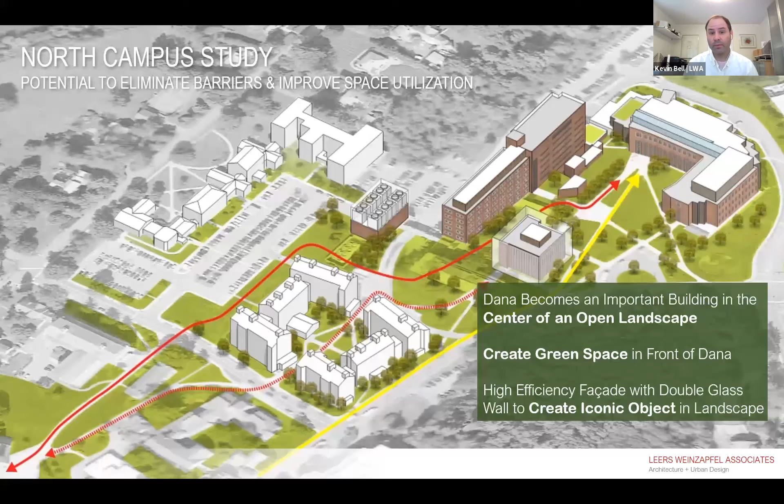And really we were looking at a double skin, a double wall facade. So we had this idea about the building being this glassy envelope, a new glassy envelope around the existing brick building that was the Dana Medical Library. That's something kind of akin to the Academic Center at the University of Oregon by ZGF Architects.

And so you can see Anonymous Hall is at the end of College Street, and the campus really spirals out from the green away to athletics, student life, connection to Main Street to the south. But we wanted to develop and really reinforce some of the interior pedestrian paths that made their way from the green up to North Campus.

So we really completed a path that existed in some ways, but never really was completed until this project and the work on Anonymous.

So with that, I'm going to turn it over to Craig to talk a bit about the energy goals and technical analyses. Hi everybody. So like a lot of universities, Dartmouth has ambitious energy and sustainability goals. They have a campus sustainability office, climate action plans, and things like that. They have energy policies that get down to prescriptive requirements for enclosures and things such as that.

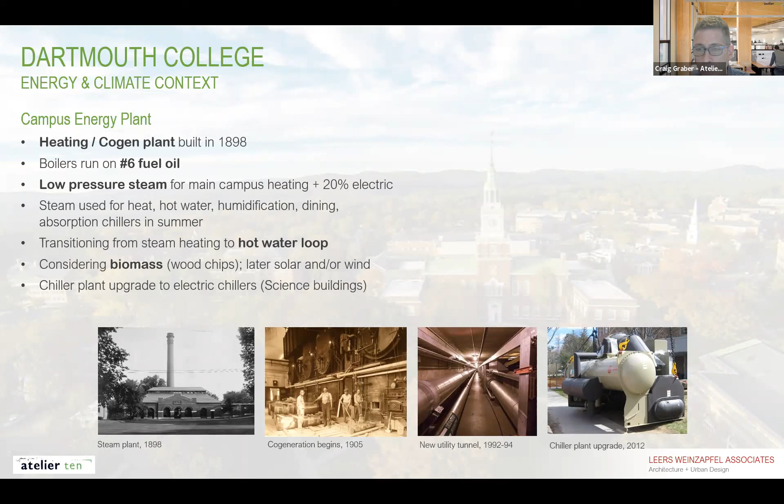They're kind of transitioning the distribution from steam to hot water, and then the plan is to transition the fuel from oil to biomass, because there's a lot of that around in the woods surrounding Dartmouth, and then later to solar and wind to help them meet those renewable thresholds by mid and end of the century.

And then next, Kevin. I'm imagining most of this audience here is in the Boston area, so pretty cold up in New Hampshire, zone 6A, heating dominated, cold winters, a lot of snow, a lot of cloudy days. So we always start by looking at the climate and seeing what strategies make the most sense for this particular climate.

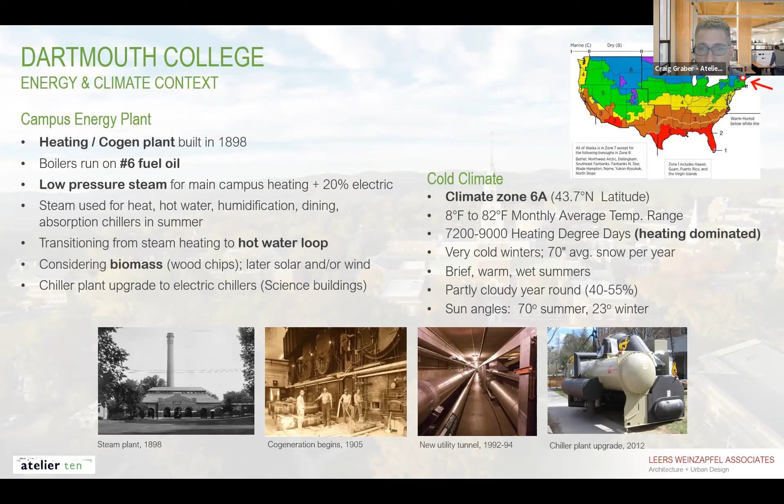When we work with LWA, and really with any architect, on all projects, we like to start with the passive design principles first. I'm sure the COTE population knows about passive design, but we're talking about climate responsive strategies, the stuff that's good, responsible design, the kind of stuff architects did 100 years ago without thinking, and then we kind of got away from it in the middle of the last century.

But for this particular climate, for this project, the principles we targeted were: because it's an existing building, gut renovation, trying to keep as much of that embodied carbon on campus as possible. Preventing heat loss, since it's a heating dominated climate, we want to keep that heat in the building, and then balancing that with letting the sun in, using that for passive solar heating.

You see that the glazed facade is a southwest facing facade, so trying to balance letting in the appropriate amount of daylight, not letting in too much heat gain, and so on. And then naturally ventilate if possible. In this particular climate, there's a lot of opportunity for that.

These are some of the specific strategies we ended up pursuing: reusing the building structure, we'll get into that in a couple minutes. Compact massing, LWA essentially was following the massing in the existing building, but this kind of massing makes a lot of sense in a cold climate.

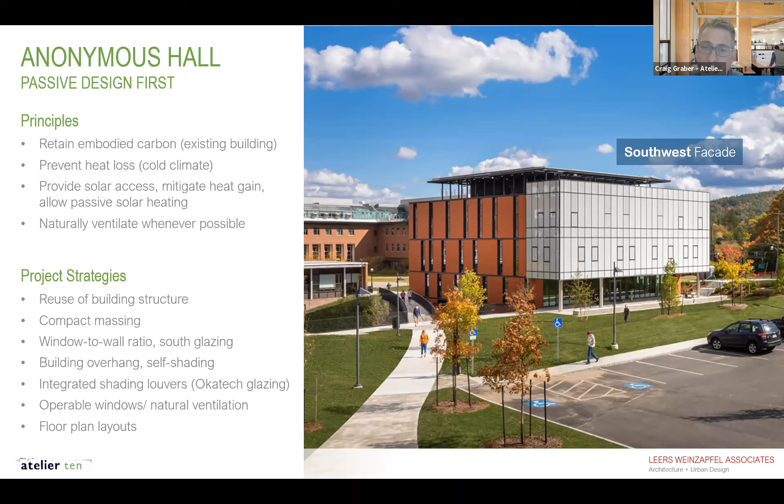Those spaces on the south side are predominantly more lounge, gathering, and circulation type spaces where people are moving through, transitory kind of spaces. So people have the flexibility to get up and move seats if they happen to be sitting in the direct sun. That informed the floor plans as well.

We'll be touching on each of these strategies, but we didn't quite get to net zero. We're going to describe the process and the thinking, but these are some of the strategies: the insulation of the opaque walls, the efficient mechanical systems. Once you're getting all your loads down and have a good envelope, then you start looking at the renewable energy.

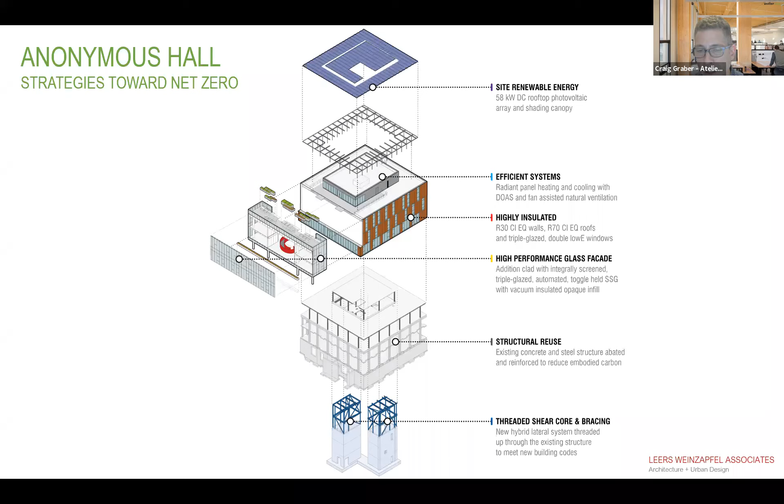I just want to talk for a little bit about our role on the project, what we call environmental design, which is the technical analysis that supports the design team. We like to get started early.

In this case, we were brought on during concept, so our work is more front loaded, and we're trying to inform the design. We work very iteratively and integratively with the architect and the design team, with the goal of answering the questions they're trying to get answered. We don't want to do analysis just for the sake of doing it - what are the tricky questions we can help with through technical analysis to optimize the design?

I'm going to go through some of these at a high level to show you what kind of questions came up and the types of studies we did to address them. These are some of the early double skin concepts with different shading options - there are three of them. As mentioned, that was the beginning point, a double skin facade on the southwest facade.

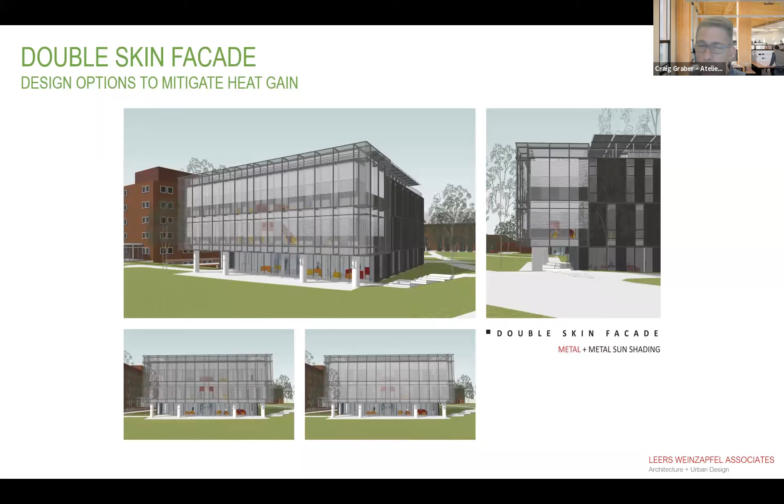And then I can't remember at what point in the design phase it transitioned to a non-double skin facade, but at one point that was eliminated from the project. Kevin, you could probably give a little more color on that - maybe you're going to touch on that later.

I think the move from a double skin facade to the fused skin, as you might call it, wasn't that the double skin facade was crazy expensive relative to everything else in the project. It was just that, as a CM or contractor would call it, the low-hanging fruit - the item for which more people could live without it. And we wanted to preserve the energy efficiency of the building. So quite frankly, we felt we could save money here and work really hard to maintain the performance that the analyses Craig's going to talk about described as possible out of the double skin, and maybe even try to improve that when we move to the fused skin.

Thanks, Kevin. So a lot of what I'm going to show are studies based on the double skin concept at that time. The first question we were trying to tackle, back in concept, was: does that double skin facade really help when it comes to thermal comfort compared to a triple glazed facade? Triple glazing, by the way, is the campus standard for other buildings.

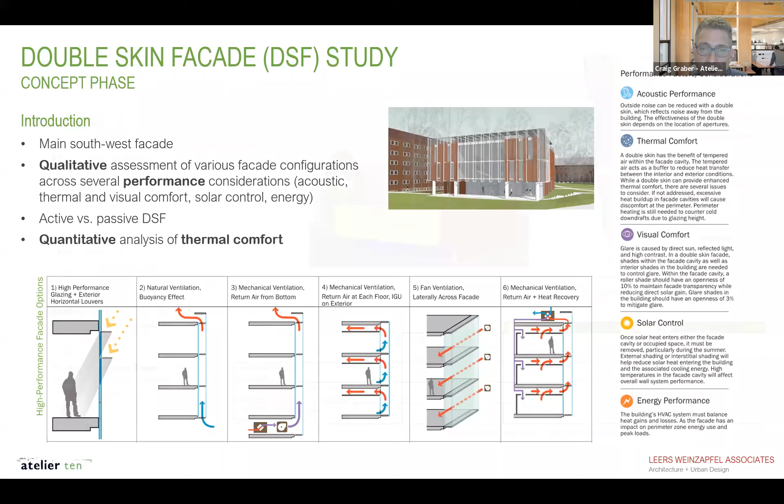We did do a thermal comfort study, a multi-tool study using Grasshopper and our own spreadsheets, evaluating the design at that point against ASHRAE criteria. ASHRAE 55 has set criteria for thermal comfort having to do with the temperature differential between the surface temperature of the glass and the air temperature in the space. So what you're seeing on the bottom is looking at different options - the baseline, which is triple pane, versus a couple of different double skins - making certain assumptions for the glass and calculating the surface temperatures, then comparing those to the ASHRAE standard to see if it would comply.

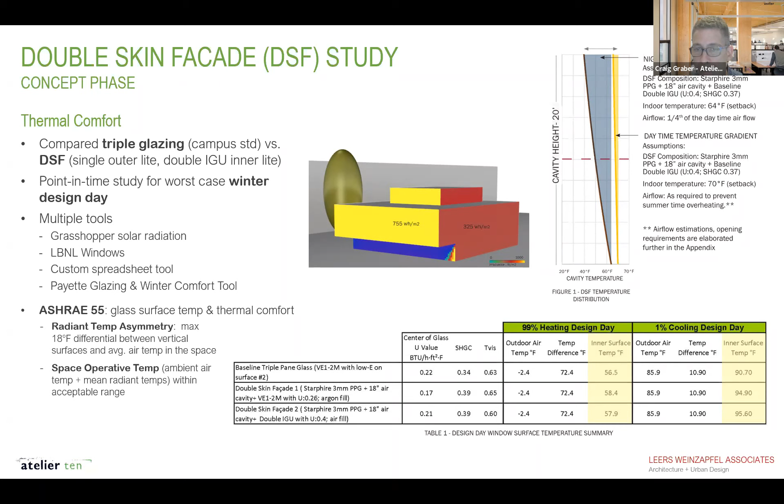What we found is that the double skin was actually performing very well as a thermal buffer. The temperature within that cavity, which I think was about 18 inches, was significantly higher than the outdoor air temperature. What that translates to is that the inner surface of the glass, the inside surface of the double skin, was significantly warmer, and that was giving thermal comfort to the occupants.

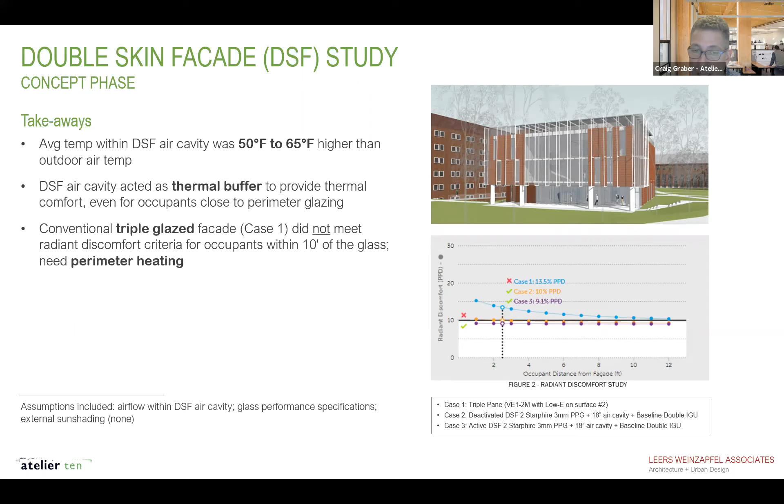What you're seeing here also is from the Payette tool, which is a great online tool - this is a snip from the results. We looked at case 1, triple glazing, and cases 2 and 3, two types of double skin facades. It showed that the triple glazing was not meeting the thermal comfort criteria - it's above that 10% dissatisfied threshold.

Moving a little further into the project, in DD phase, looking again at the double skin, but more about daylight and the visual environment - how much daylight is going to be available. When we talk about daylight, more is not better - there is such a thing as too much daylight. It causes thermal discomfort and glare, so we want useful daylight, and we call that visual comfort.

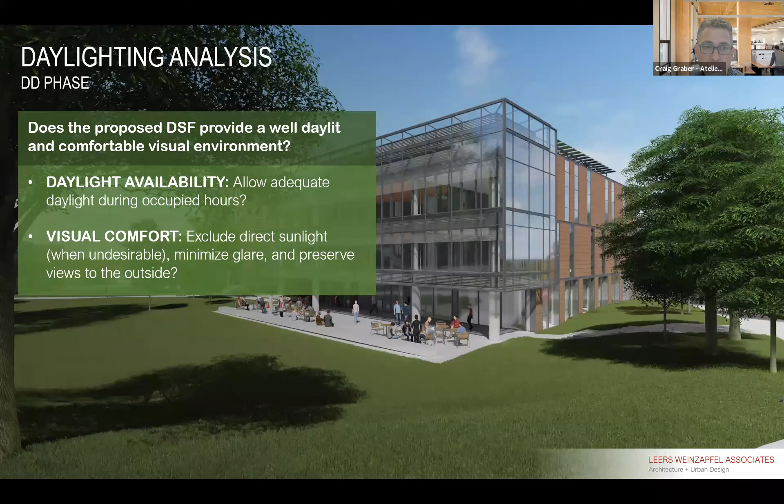So here you're seeing a section through that double skin facade. In this study, we were looking at different sun shading options within the double skin cavity and giving feedback to LWA to help them optimize it. You can see some of the sun shading goals, which are general goals you'd pursue on any project.

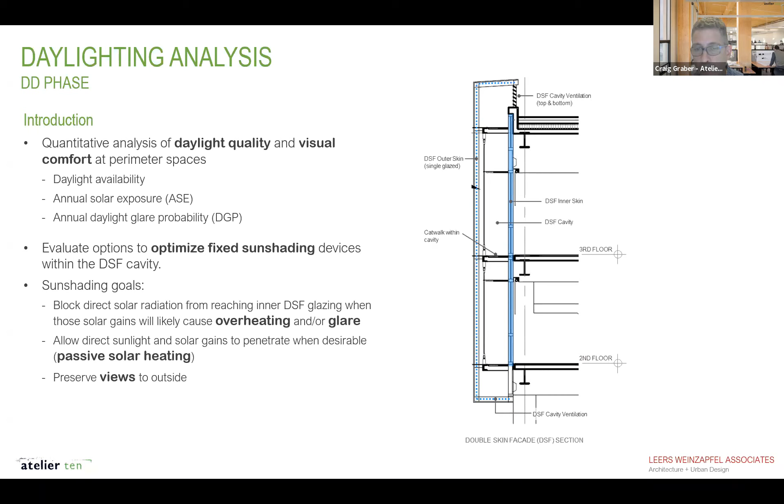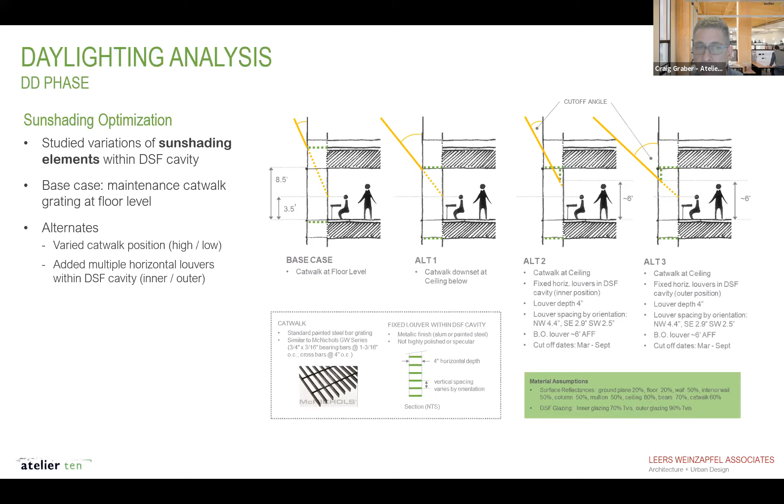We looked at different cases, always trying to set a base case. The double skin facade had a maintenance catwalk - you can see in the base case there's a dashed green line at the floor level. We varied that in different ways: we moved the catwalk to the ceiling, added horizontal components at the outer surface, looked at how that would affect the sun cutoff angle, and modeled and simulated the daylight.

These are a couple of different metrics we look at. On the left is glare probability - these are heat maps. The green charts along the top axis show the months from January to December, and along the left, the y-axis is time of day, from morning at the top to midday to afternoon. Wherever you see red, that's where there's a concern for glare.

With this base case, we're looking at three different conditions, different offices, different points. In the southwest-facing private office in the middle, you see a lot of red from about 10 to 2 in the afternoon, when basically the shades have to be down, otherwise those people won't be able to work in that office. That's helped us predict the glare potential.

On the right, sunlight exposure is a metric that tells us what portion of the floor area will see direct sunlight. When we talk about daylight, we want diffuse daylight - we don't want direct beams of sun landing on your work surface, your screen, or in your eyes. ASE measures the percent of floor area where direct sunlight is a concern.

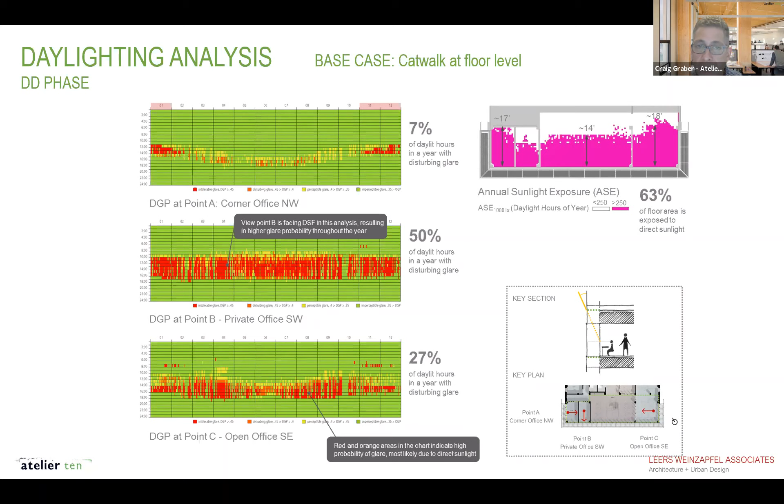I think a lesson here for us, Craig, was not to put offices up against these windows. That was a programmatic change and reorganization that came out of this. So it's not always just about what the facade needs to do to respond - sometimes moving a couple of offices is actually the better part of valor.

Then we looked at different times of day, different times of year, and the different design alternatives, the base case versus other variations.

And in our reports, we always try to pull it together at the end. This is a summary table of each of the metrics mapped along each of the design alternates, and the ones we're recommending and preferring, and some recommendations and considerations, including the workstations and plan layouts, as Kevin mentioned, and where we felt the louvers would be the most effective.

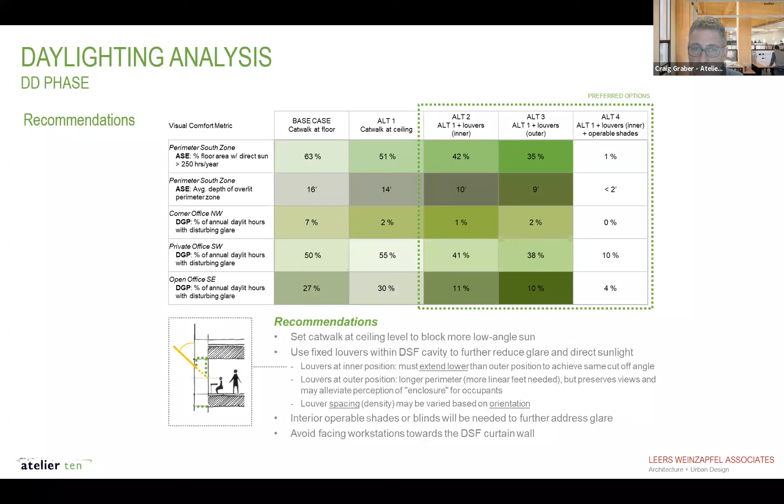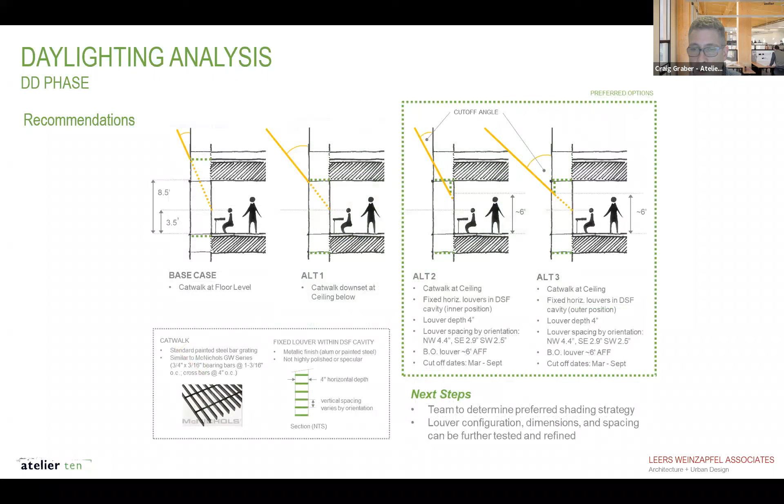We had specific recommendations about the size of the louvers and the spacing and so on. This is the kind of feedback where we try to make our graphics accessible. We're sort of visual people, and architects often are also.

So we find that's a good way to communicate it. Next, we were again looking at the double skin facade and also the punched windows, trying to assess whether triple glazing would be a benefit over double glazing.

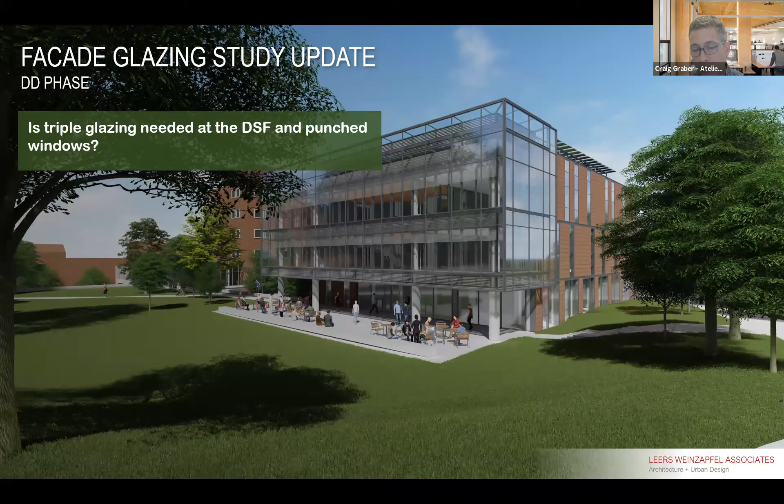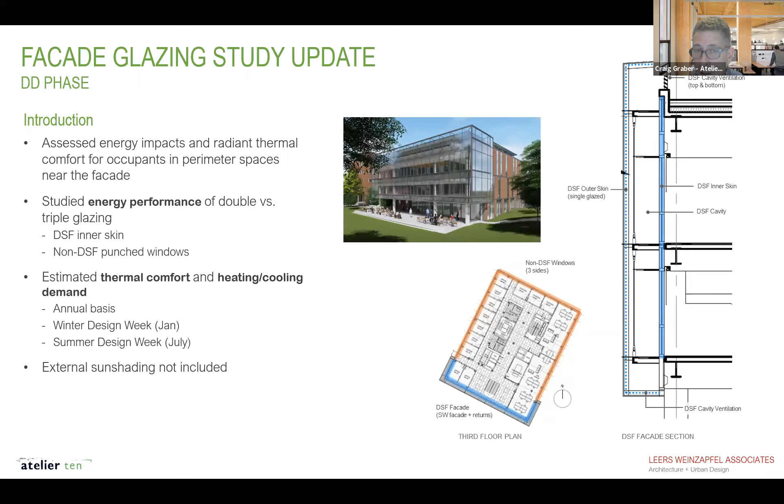Here we started to look at energy performance. We were not the energy modelers for the project - the mechanical engineer, Van Zelm, did the energy modeling also, so they were doing some studies side by side. Here we were looking at how the envelope would affect the heating and cooling loads in the building, and how that might affect the mechanical system sizing.

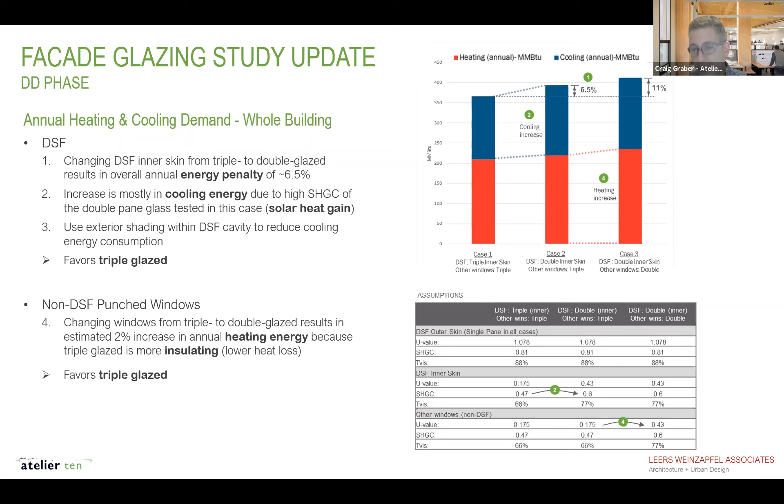These are just some quick studies looking at the different cases, triple versus double, how that affects the cooling and heating loads, how that affects the surface temperatures. When it came to looking at energy issues, that favored triple glazing, because that's going to result in less heat loss.

Then we zoomed in on some worst case conditions, like the worst peak winter week and the worst case summer. What you're seeing is variation in temperatures in the space and on the surface of the glass, and how that informs the thermal comfort. The triple glazing gave a little bit of extra thermal comfort, but the double skin was performing well on thermal comfort because that cavity was acting as a buffer. So what we suggested to LWA is triple glazing is not necessary at the double skin facade, because that's already acceptable thermal comfort there.

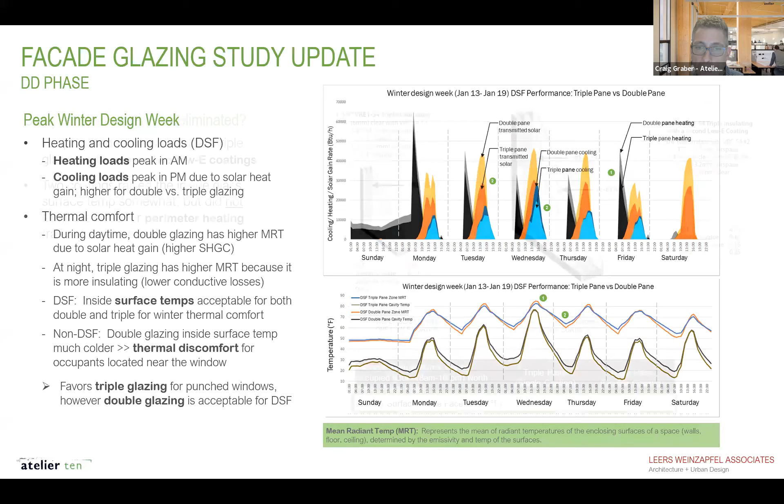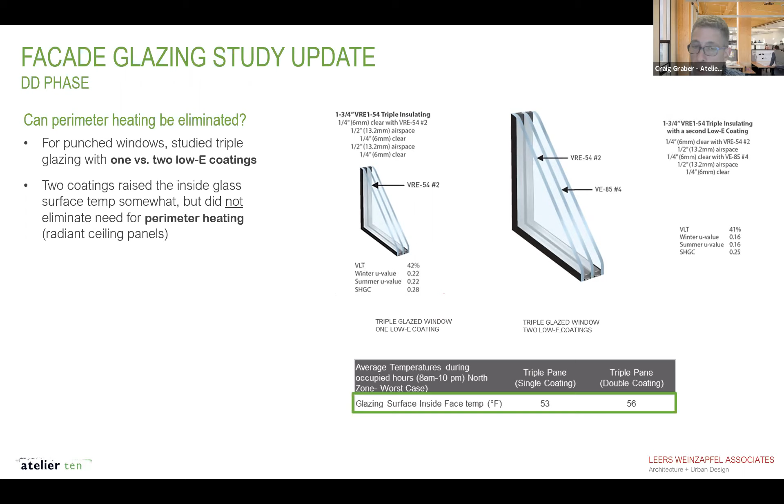Then the question that always comes up is, if you go to triple glaze, can you then eliminate the perimeter heating? Working with LWA, we looked at a few different options for the glass coatings, one coating versus two coatings on triple glazing, and there was an improvement. What you're seeing in that table at the bottom is the surface temperature at the inside of the glass. In neither case, even adding that second coating, does it get that surface temperature up to the point where you can eliminate the perimeter heating. So perimeter heating was still needed even with triple glazing at the punched windows.

So the recommendations for this study: at the double skin, the double pane glass is fine, it's more economical, and the thermal comfort's acceptable. But at the punched windows, we felt they should go to triple glazing, mainly for the thermal comfort benefits. And then the furniture recommendations as well, as Kevin mentioned.

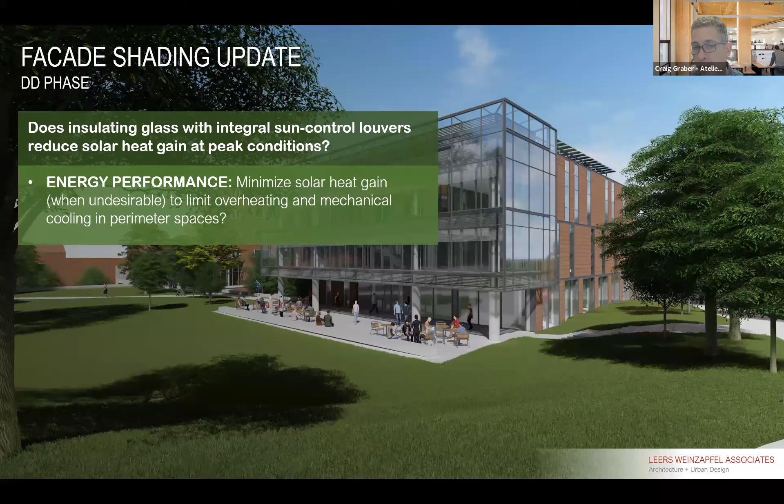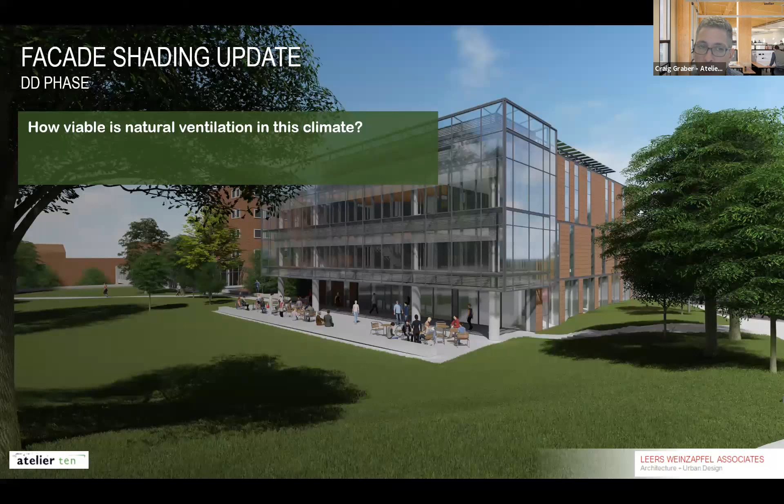Basically during the peak loaded cooling times, we were in mechanical cooling mode. But there are many hours when we can use natural ventilation, and you saw those operable windows on all four facades of the building.

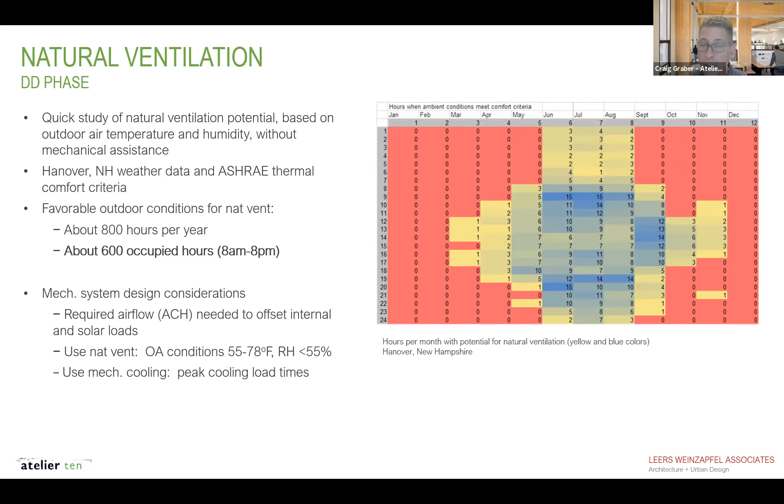Okay, so that's a quick rundown of some of the studies we used working with the team to help inform the design. At a certain point it moved away from the double skin towards a high performance, I think Kevin called it a fused skin facade, triple glazed.

So we're going to go through 5 strategies now. I'll cover the first one, which is building reuse, structural reuse.

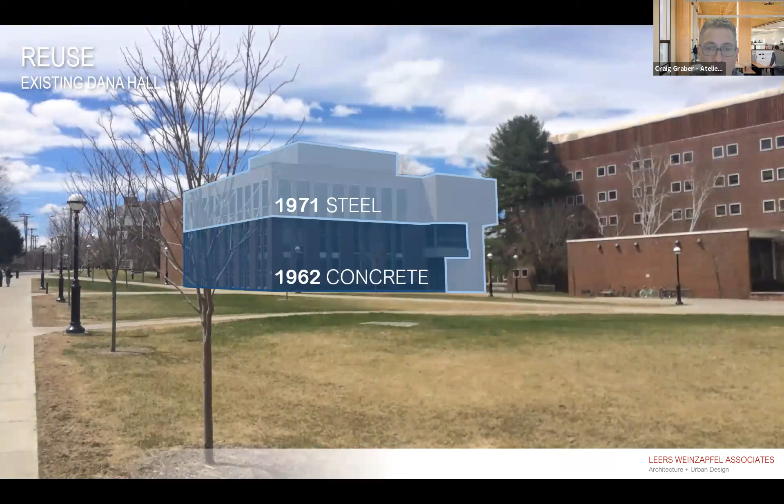This is the original building, a concrete building from the early 60s. A penthouse was added in steel in the early 70s. Kevin, you have more background than me, so feel free to chime in.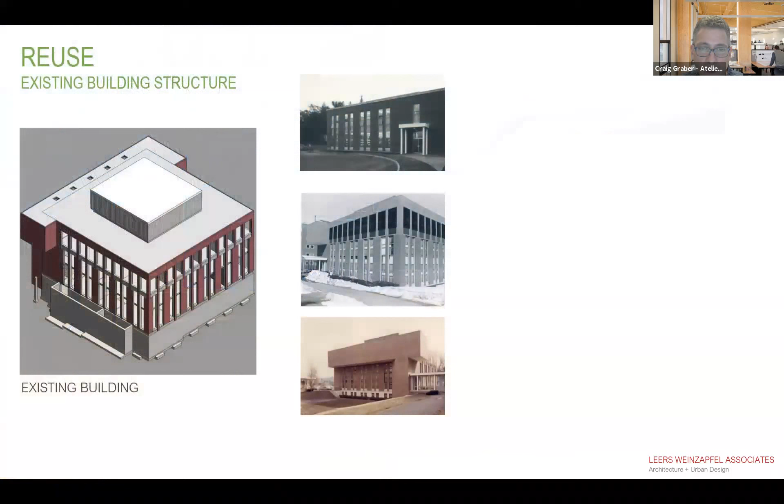You can see the history in photographs of the building itself, and some of the beautiful hand-drawn details -- those skills are now lost.

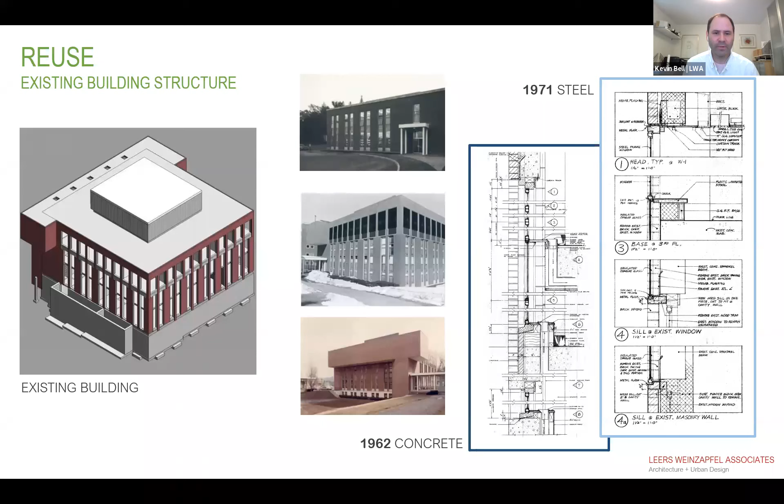Yeah, and I think the note on those details is that the R value for these walls is about 2, for anyone keeping score. Frankly, energy wasn't a big consideration then. Energy was cheap, so before the oil embargo in the 70s, we didn't really think about these things.

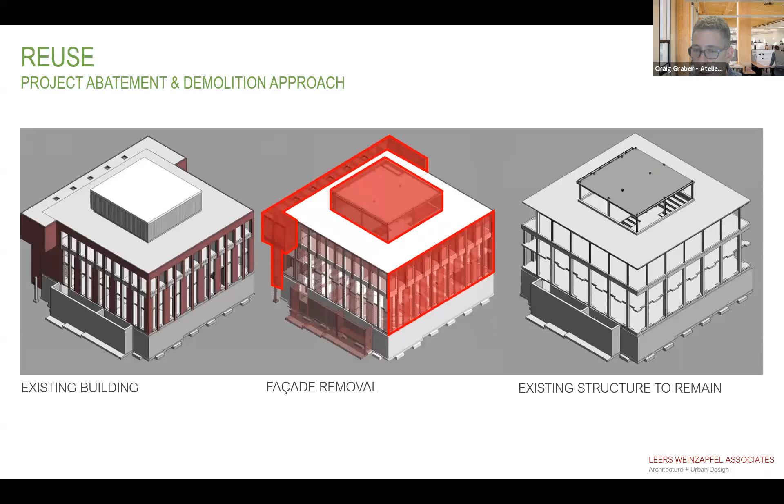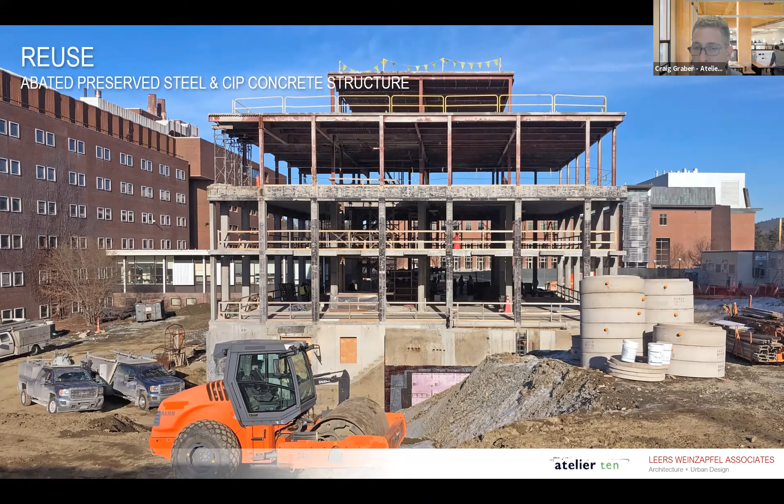We didn't know any better then. I know LWA wanted to retain as much of the building as they could, but because of the hazardous materials, that drove a lot of the decisions. Also, it was a low-performing, R2 facade, and this building is meant to last the next 60 to 80 years, so the university wanted a higher performing facade, and we could not achieve that with the previous envelope.

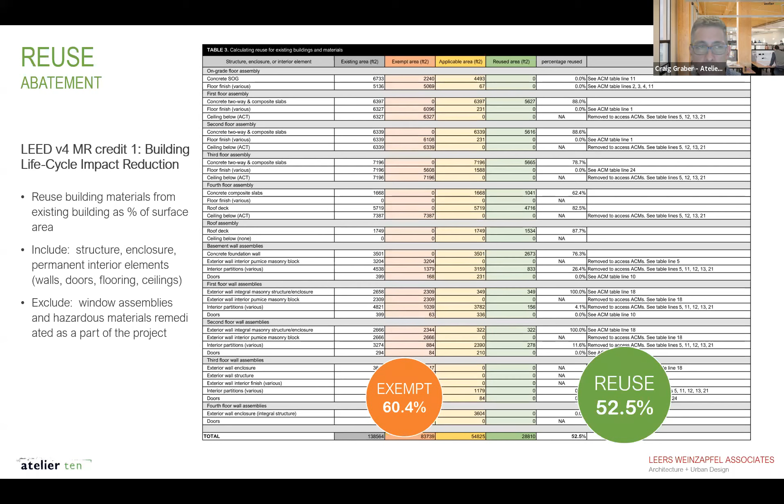By the way, in that credit, you can exempt anything that had to be removed because of hazardous materials, so we're not being penalized for that. Kevin, I don't know much about this, do you want to make a point?

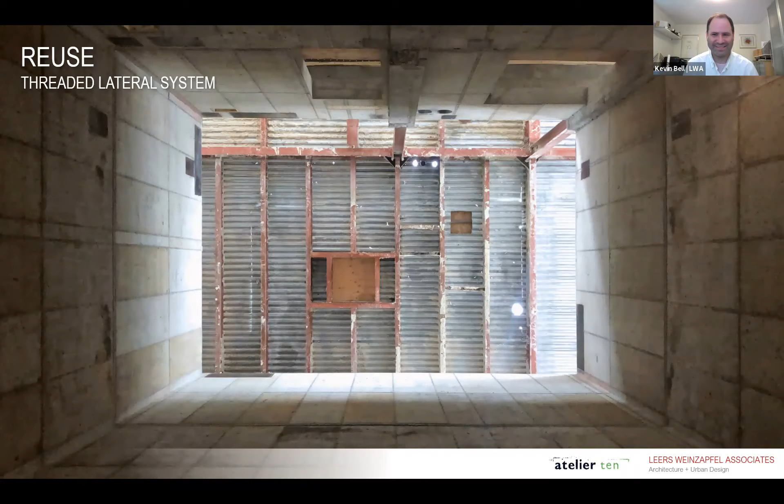This is just a fun photo looking up the shear core, which is really the main structural element we had to add to help this building last the next 60 to 80 years. We treated the building, although existing, as new, so the entire lateral system for the building was upgraded. It's just a fun photo.

We didn't do a detailed embodied carbon study, but we tried to do a high level, quick estimation of what we're really saving by keeping that existing concrete. Kevin pulled out some quantities from the Revit model -- over 20,000 cubic feet of concrete structure that's been saved and retained, and that translates into a lot of emissions avoided.

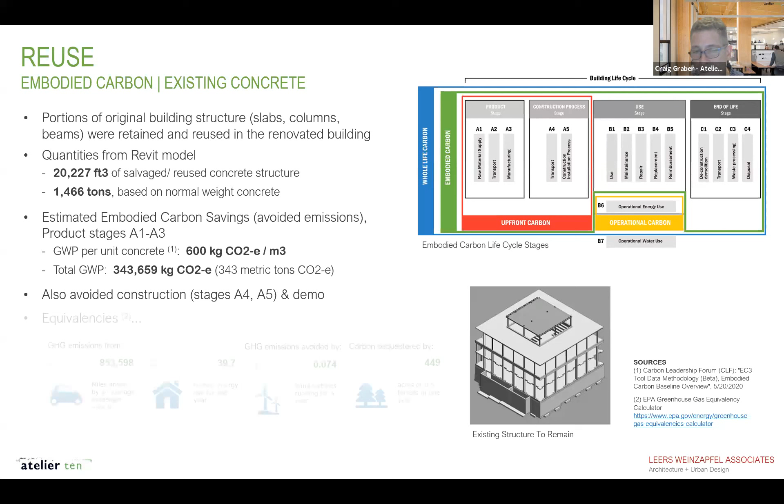You probably know that concrete is responsible for a lot of global emissions -- some estimate up to 8% -- mostly from the Portland cement. So this is really a huge win for the project to be able to retain all this concrete. On the lower left, we calculated some equivalencies, like equivalent driving miles. We feel like this is a big part of the sustainability story in the end.

I think that's probably it for me. And sorry, I think I probably took a little too much time, but I enjoyed talking about this building.

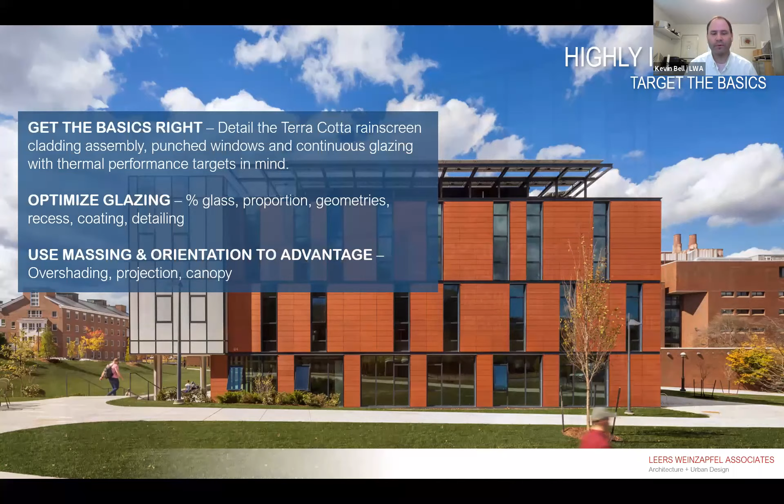Thanks, Craig. So the second strategy is highly insulated. The idea is to target the basics first, get things right on the majority of our facade, optimize glazing, and then use massing and orientation as Craig described. That's really what we tried to focus on for the mostly opaque

facades of the building. Our facade is lightweight. We removed the CMU and brick from the building and didn't want to go back with that same kind of weight. We're trying to deload it a little bit.

We're trying to optimize the solid, and that's where the college had a requirement for an R30. We pushed that to make it a continuous equivalent. To achieve that, we have 6 inches of rigid insulation outboard of the air barrier, outboard of the steel stud wall, and then some batt insulation in the steel stud.

That was driven by a couple of factors. To go much deeper than that, we'd be beyond the limits of the curtain wall snap caps, so we'd be into a multiple extrusion. We'd also potentially need a third layer of mineral wool applied to the wall. So we were trying to be conscientious of maximum thicknesses of materials while remaining economical. Rather than 5 inches, which would be a 2 inch and 3 inch thickness piece of mineral wool, 3 and 3 cost the same to install.

The system we were using here, which is a thermally improved aluminum system for terracotta, could be economically developed to about 7 inches, but much beyond that, things got a bit more expensive.

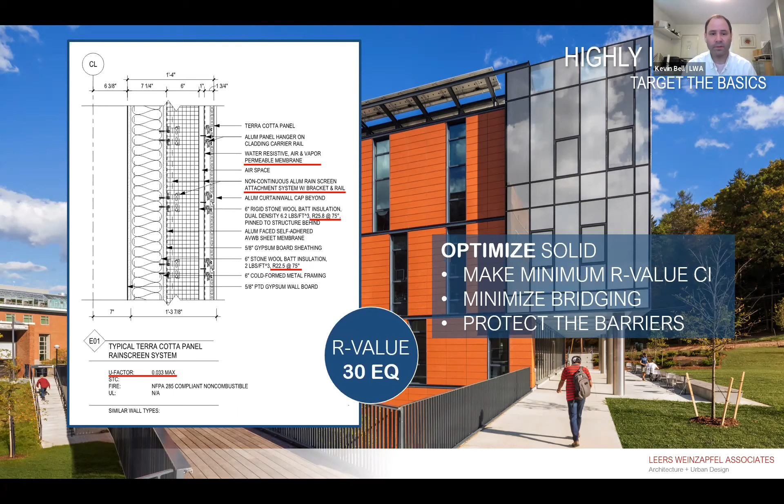So we continued that idea of highly insulated to the roof. We have a minimum of R60 equivalent continuous, and then we get up to about R90 out at the edges just for sloping for drainage.

Important when we added this new facade was to push it outboard of the existing concrete slab edges. We wanted to maintain continuity of the insulation basically from the ground up over the parapet, across the roof, and back down the other side of the building. So limiting thermal bridging up at the parapet, and also where we had to project canopies out on the north side where we have an entry.

We improved that connection by using, in our case here, a Fabreeka TIM system, structural thermal break for the canopy steel.

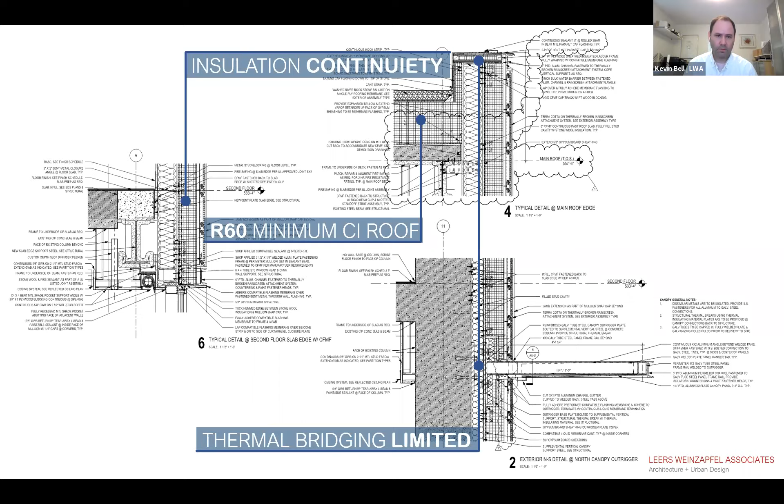Part of that highly insulated strategy is optimizing the openings. We talked about percent glass, proportions, east and west were vertical proportions on the windows. We deeply set them, so we get a little bit of shadowing on the window, just by the natural geometries of the opening.

Although Craig noted the second low E coating didn't help us necessarily with thermal comfort at the edge, it did improve winter U value a good bit. We were trying to make this envelope as effective as possible, and adding an additional low E coating is not a substantial cost premium once you're already into triple glazing.

Obviously important is just the continuity of that thermal barrier, so making sure your glass is in line with your primary thermal insulation. So we pushed out beyond the studs, in line with our continuous insulation on the outside. Then we detailed it so it's well sealed around the edges, tucking that bulk water barrier in.

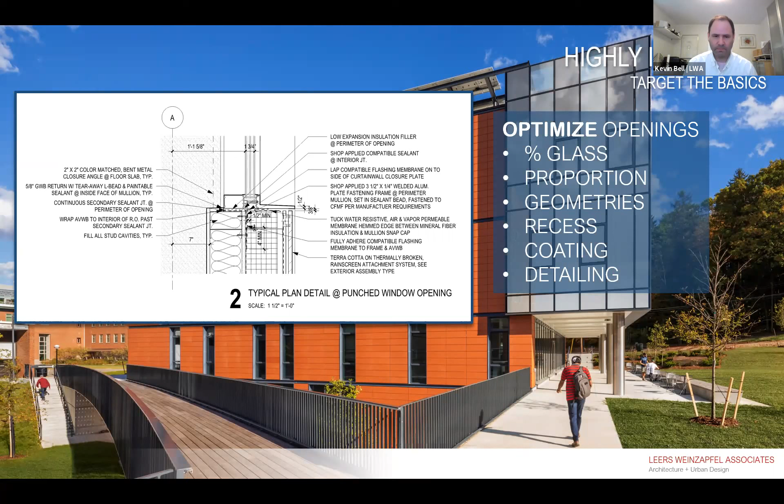So we get not only a good primary seal between curtain wall and the opaque wall, but we also have a secondary seal, and then we have that bulk water barrier. So a really tight building overall on these sides with the opaque.

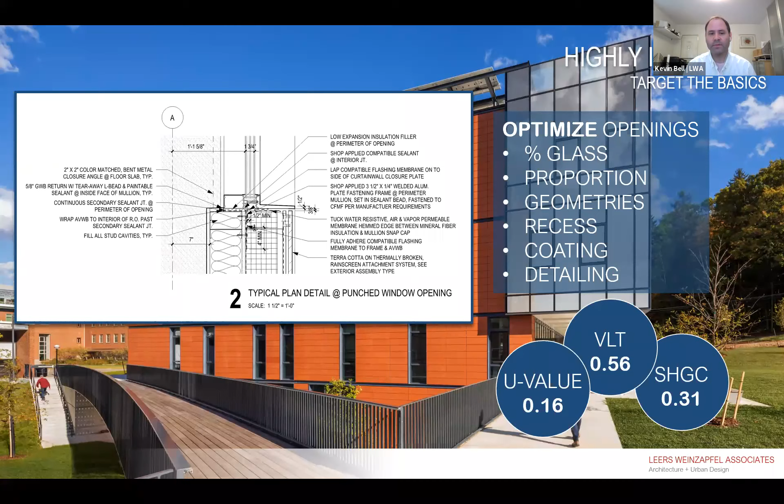These are some center glass values, but the center glass value on that triple glazing is 0.16, which I think is pretty standard now, hopefully for folks doing triple glazing, still with good visible light transmittance and some pretty good solar heat gain coefficient.

That brings us to the fourth facade, kind of the elephant in the room.

Glass on a south-southwest facing facade, all glass. It was really important to us as part of this project that the building feel as open to this new green space to the south, as open to the rest of campus as possible, and inviting to the extent we could. Really being able to look out from inside and connect back to campus was a critical component of the success of this project.

So in order to do that, once we no longer had the double skin facade, we needed to find a do-everything system. That's a system that has improved thermal resistance, R-value, lower glare, lower solar heat gain, still provides views, is bird safe, dark skies, and allows us to naturally ventilate in an efficient manner.

And something that's a bit of a trick, but as day turns to night, we still get an opportunity to see in through it. So it's a dynamic facade because of the integral mesh, and it changes as you move around the building. It changes with the time of day.

What we were trying to do, because in some respects this was a cost control measure, was to use components that were tested, components that were available, but to put them together in a novel assembly of parts.

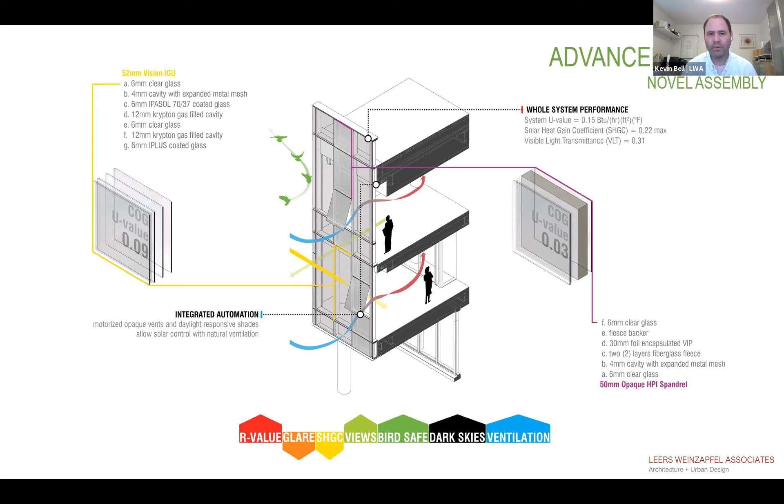So these 2 pieces of glass work together to give us an overall system U value of about 0.15, which for a curtain wall is pretty good, while maintaining pretty okay visible light transmittance of 0.31, but reducing the maximum solar heat gain to about 0.22.

Again, this idea of tested components - we want to make sure we're addressing each piece of heat gain. For radiation, we have that expanded metal mesh and a coating on the glass to reduce convection currents within the units themselves, and reduce the amount of transmission through by filling the 2 cavities in the triple glazing with krypton gas.

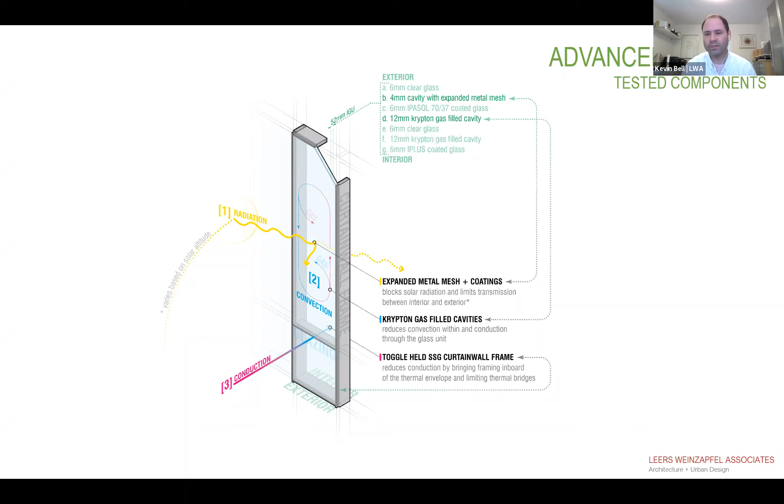For conduction, we went to a silicone structurally glazed curtain wall system, which basically pushes all of the glazing outboard of the aluminum framing, which is highly conductive, putting it behind some backer rods, some sealant, and a little bit of air. Ultimately that reduces conduction at the edge, the perimeter edge, of each of these panes of glass.

The mesh itself is pretty simple. It's expanded metal mesh, like what I think it's Rem Koolhaas used on the Seattle Public Library, as well as what was used at the de Young Museum, I believe, in copper.

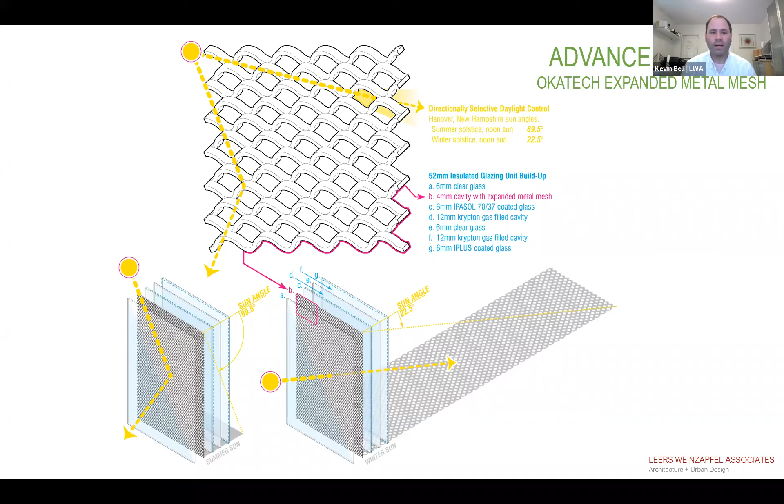Basically, by the geometry of that mesh, high-level sun is reflected back out of the IGU, and low-level sun is allowed to move through. Much of the light that does make its way through the system is actually diffused up towards the ceiling, and it really softens the light overall.

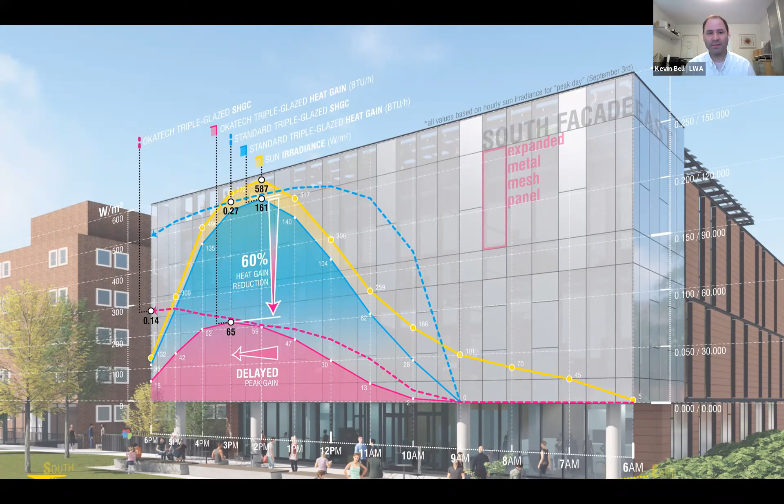What that metal mesh in the system does, paired with the single low-E coating, is for us on the south facing facade, lower our heat gain below standard triple glazing by about 60%. But it also delays the peak gain, which is a small thing, but allows us, on some days, to actually move that peak gain after the highest occupancy. So we're trying to get a little bit of time between when most people are in the building and when most of the sun energy is being transmitted through the building or through the facade system.

This is just a quick look at that vacuum insulated panel. It's basically a fumed silica core encapsulated in a bag, with an aluminum element on either side that's sealed, and then the space is evacuated of air. What you get is a near vacuum, which is kind of the ideal solution for insulation. So in a 1-inch panel, you get an R value that is incredibly high for the thickness.

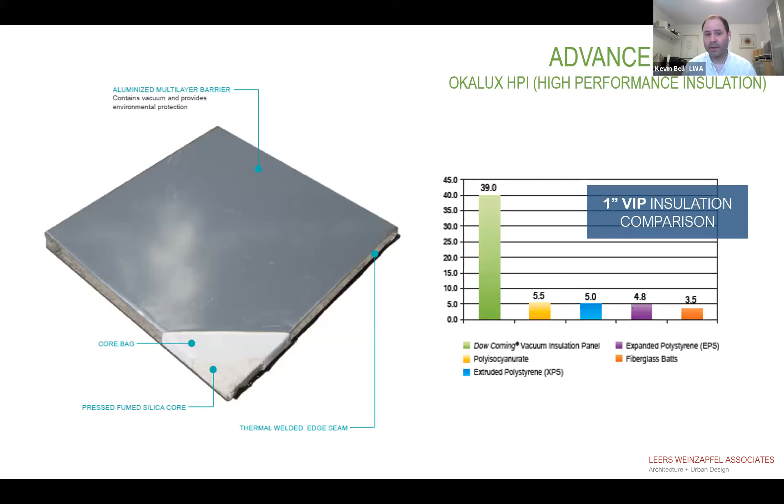This is a thermal analysis overlaid with some other thermal analyses for other systems. What's really important here is that the backside of the HPI panel, on the left, has relatively high temperatures. Even our triple glazed light has a really warm inside face. This really limits the need for perimeter radiation, but makes it a very comfortable place to be. You can see the aluminum mullion itself, because it's structurally glazed, is much warmer than what you might expect if you had a capped system with an aluminum pressure plate fastened through with all of those tiny thermal bridges.

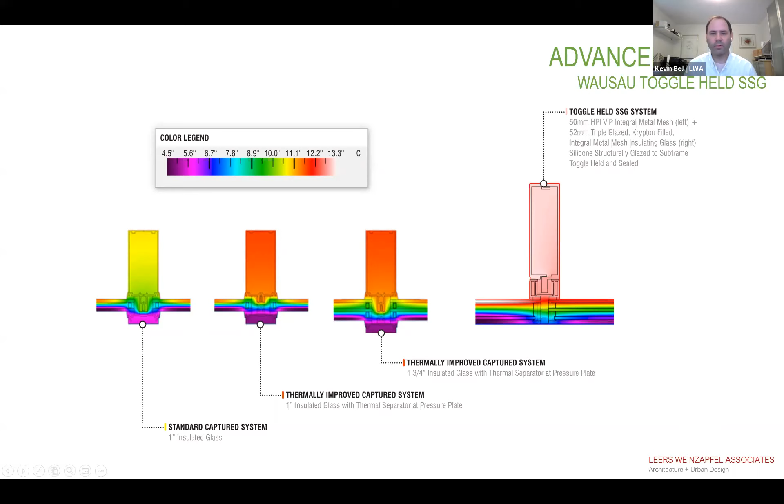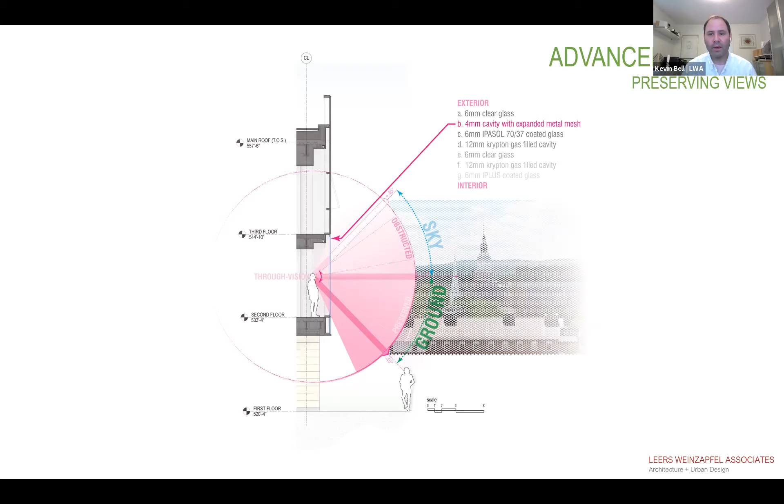A critical question is, what does this look like, and what is it like to see through? What the material does, by its geometry, is make looking out and up very difficult, since it blocks most of that view because it's blocking the sun coming in. But looking out and down, much of that view is preserved. This is a photo from late construction, but when you're back from it, you really get a good sense of what's happening outside. It's highly transparent from the inside, maybe a bit like looking through a large insect screen in some respects. The panels you don't see through are the vacuum insulated panels, the spandrel panels, if you will.

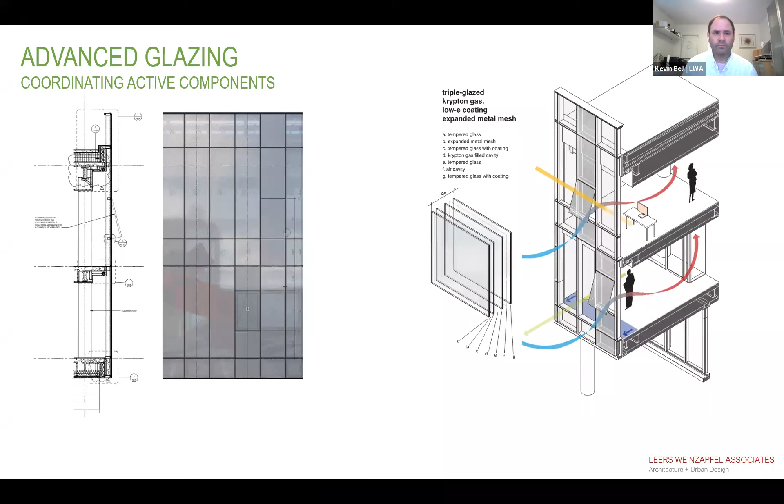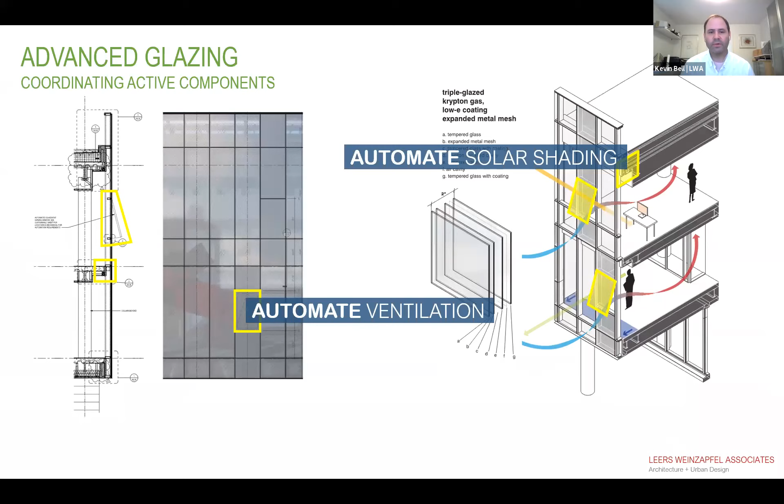As part of this system, it's important to us to integrate automated ventilation as well as solar shading. On the south side, those are automated. A neat trick of this building, made possible by the fact that the glass panels housing the operable lights are opaque, is that we didn't have to shade those pieces. So occupants of the meeting spaces on either side of the main circulation space can naturally ventilate regardless of the activity in the space. If they're giving a presentation or displaying something on the digital display, they can lower the shades but continue to naturally ventilate. We thought that was an important element of this system, being able to allow the building to work as it should at all times.

This gives you a sense of what those active window openings look like on the facade—they're the ones with the darker outline. I'll run through this quickly since we're going a bit longer than I'd hoped.

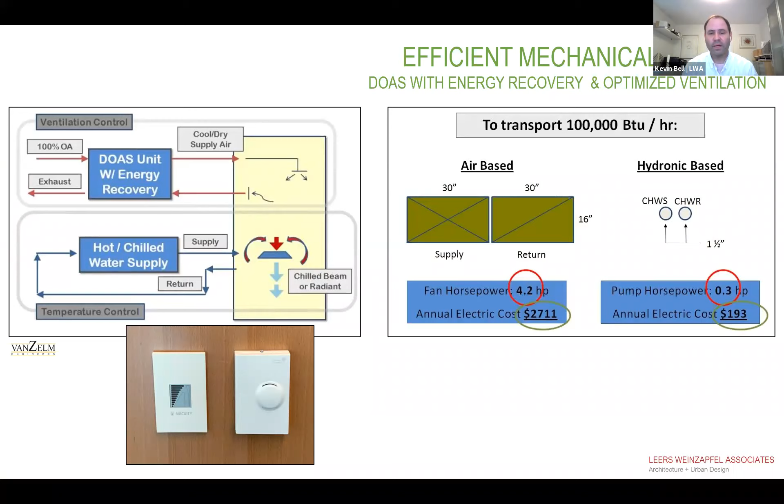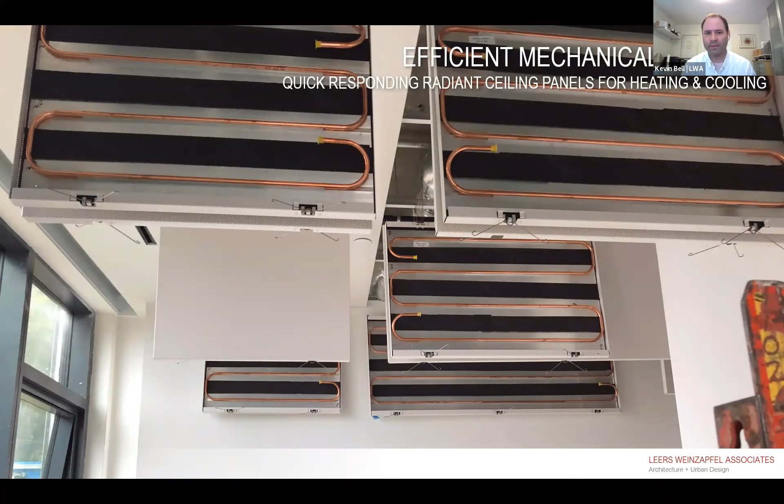The mechanical system here is decoupled. We have a DOAS with energy recovery and optimized ventilation. For heating and cooling, we use radiant ceiling panels, which was important in a renovation because we had low floor-to-floor heights and couldn't accommodate ductwork. The radiant panels pair well with natural ventilation because they're quick responding, able to heat and cool a space quickly, which matters when windows can be opened. I think it also prevents some of the condensation concerns you might get with radiant in the slab. Visually, you get a very clean ceiling with very few vents, and also a very quiet building.

Natural ventilation for the offices is manual—there's a pilot light by the door that illuminates when conditions are appropriate to naturally ventilate, and then it becomes the occupant's responsibility to open their windows. We have a little diagram and encouragement to get folks to open the window.

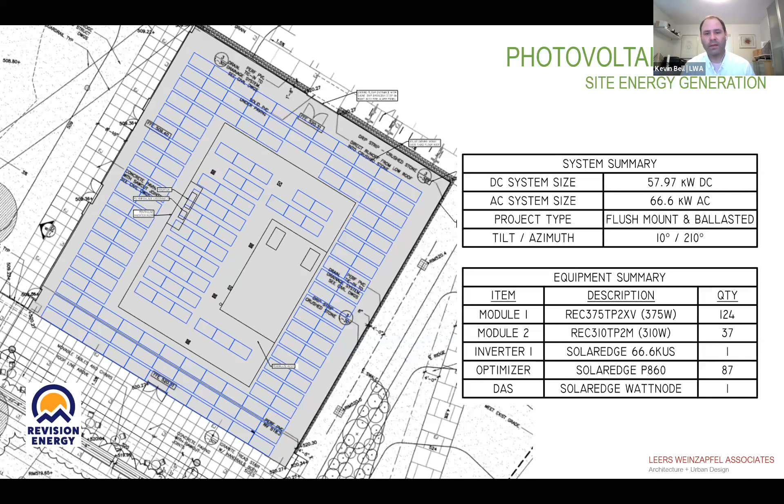The last strategy, which was economical here because Dartmouth College uses power purchase agreements to put PV on their buildings, is a 58 kilowatt photovoltaic system on the roof of the building that helps reduce our net energy use.

Something we've learned as a lesson here is that because this was done after our work on the project was complete, kind of outside our scope, we really didn't have much control over the final arrangement of PV at the roof. You can see up in the corner they could have gotten a few more panels on the roof, and probably could have optimized the orientation a bit better.

Where we've come to, at least with initial early data the college has shared with us, since we're in this COVID era, basically our energy is above where we'd like it to be. Right now our gross EUI is 43, which is well above where we had targeted, and our net is only 38. We haven't yet gotten a full year's worth of energy data on the PV to see how much energy it's actually producing.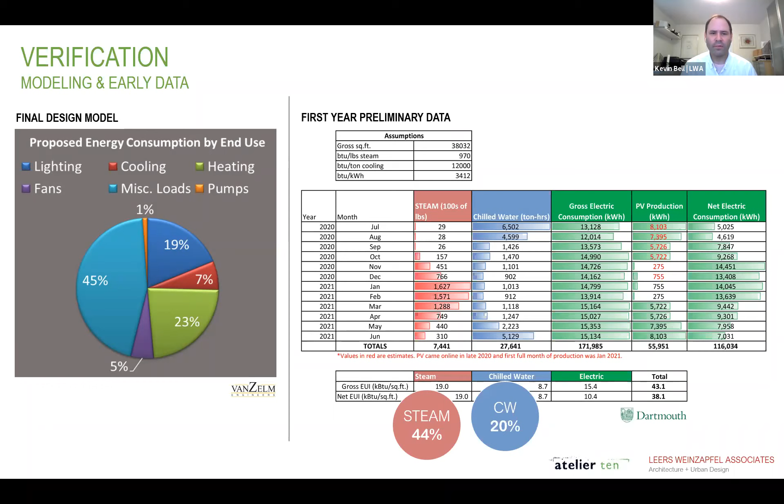That kind of takes us to the end of the presentation. This is just a summary of some of the sustainable aspects of the building, from the 5 strategies we talked about to some other strategies out in the site and around the building, some stormwater detention and other elements that we think make it a sustainable building, both inside and out, and for the college overall.

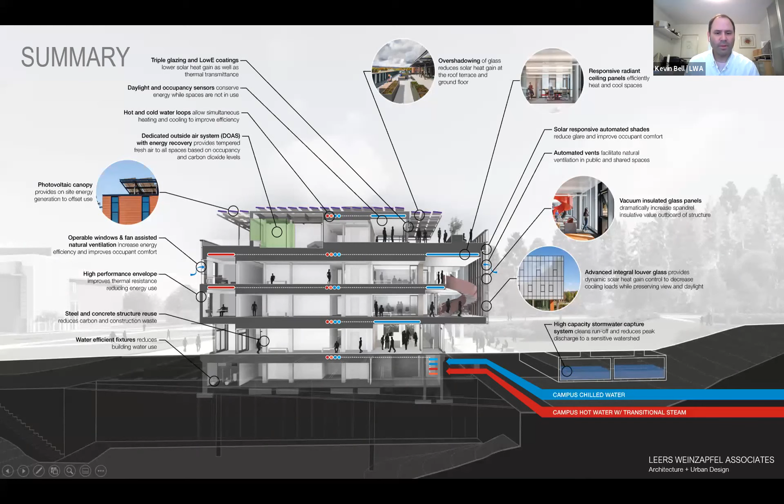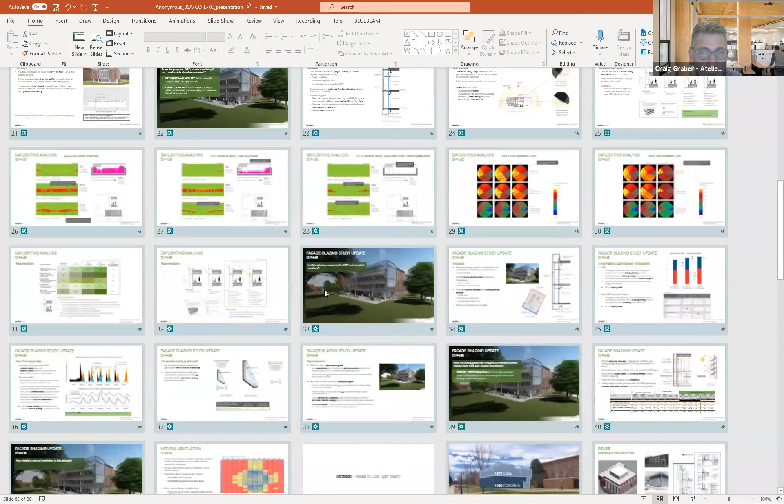But I assume there are real site reasons why that expression ended up on that side. Is that right? Yes. Let me exit out here and go to the diagram. The real generator of this was the ability to look back towards campus. So in our building up on North Campus, quite frankly, you get good views of the campus itself, a visual connection back.

A number of the folks moving into this building - it's sometimes swing space, we'll have some permanent occupants - are moving from closer to the green, actually adjacent to the green, and so maintaining that connection to the campus. I don't want to say we're turning our back to the Life Science Center or the medical school, but we really wanted to have an open element. I know that glass is highly opaque during the day, but that's why the ground floor has the terrace, has the green space out in front of it, and the glass facade. So it was really generated by that desire to connect back to the campus that's to the south.

Absolutely, that makes a lot of sense. Thank you. Thank you.

Kevin and Craig, we have a question in the chat. It says, very interesting. What is the source of the screen that softens the harsh light? Is this a custom assembly?

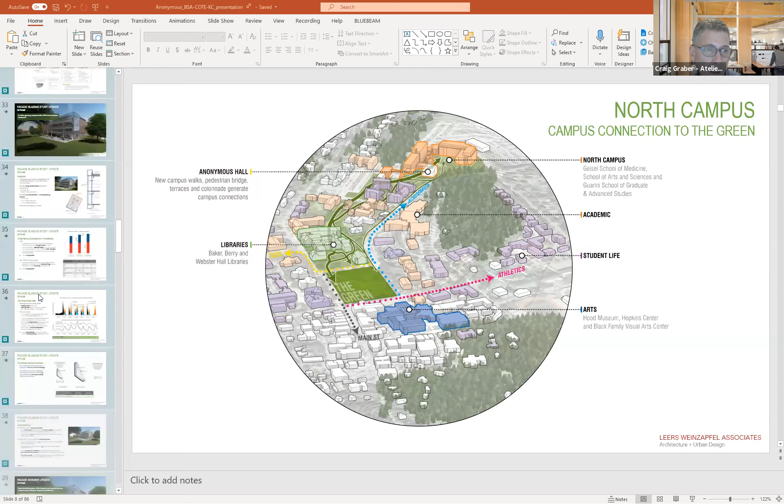Let me get to our best diagram. It's not a custom assembly. It's actually something that Okalux had used in Europe previously. It's one of their standard products. It's about 2 inches thick. It's technically triple glazed because there are 3 air cavities.

The metal mesh exists in the outboard air cavity, but there is a 4th pane of glass that separates that metal mesh from the interior. It actually allows Okalux to sandwich that metal mesh and keep it in place between those outer panes. It's aluminum, so there are temperature differentials that occur within that cavity. So the metal mesh isn't actually held rigidly by any element in each of the glass units. It's sort of floated between those 2 pieces of glass.

So it's not a custom element. The kind of novel piece of this was that this, and the HPI vacuum insulated panel which is the opaque piece, haven't been used anywhere in the US or, I think, North America prior to this. And I think it may have been the first time that they applied all of these technologies together into one facade.

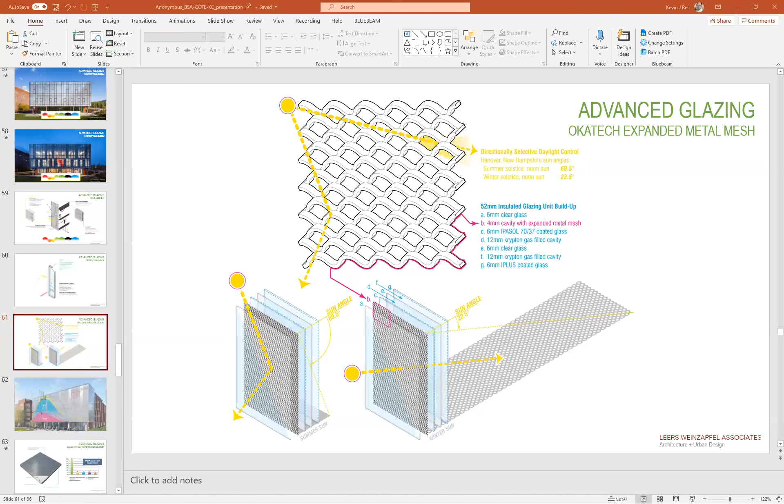Are there any other questions? Kevin and Craig, thank you so much for your impressive diagrams that have made this easy to understand. Much appreciated. You're welcome. There's a question about Kawneer's toggle curtain wall system.

Kawneer's system was one that we had specified among three. We actually ended up using Wausau's, I think it's Super Wall, their toggle held structurally glazed system. And the reason for that, at the end of the day, is that Wausau didn't have concern with 2-inch thick glass. That's slightly thicker than a lot of the manufacturers will accept as their standard. Everyone kind of at this point accepts 1 3/4 inch glass - that's kind of standard triple glaze unit. But Wausau didn't take issue with the slightly thicker glass.

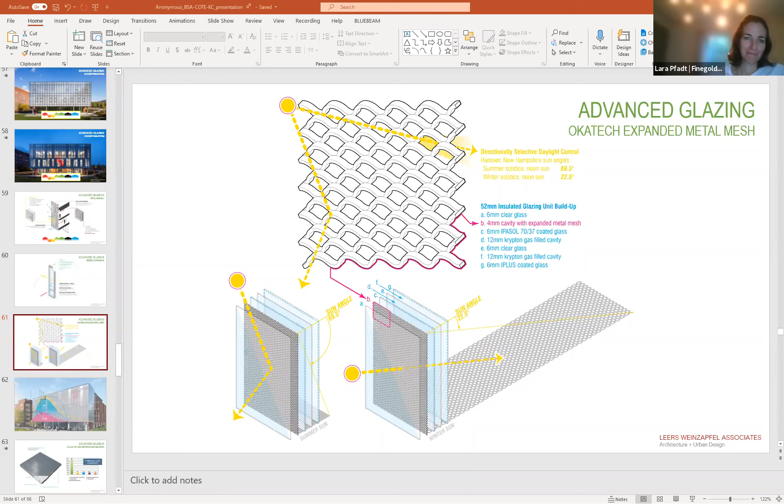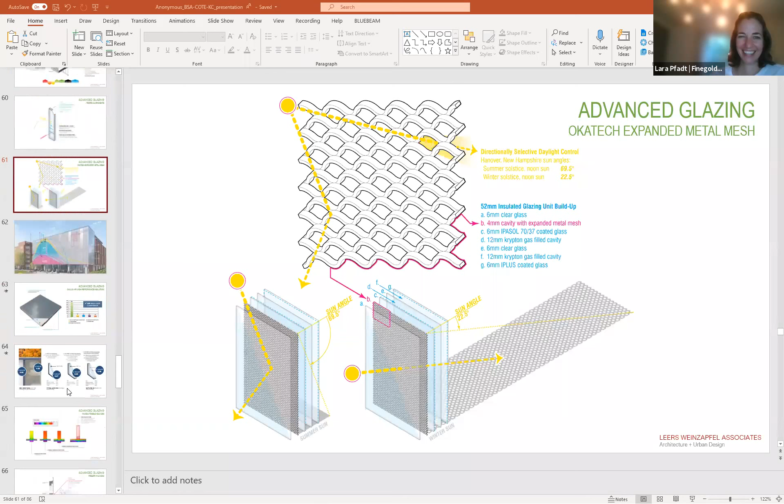And for everyone here who may not know what a toggle lock curtain wall system is, do we want to define that? This isn't great to show it, but basically a toggle held system - the glass unit itself is married to, in our case, an aluminum channel frame. And that's done with, for us, temporarily holding it in place with some 3M very high bond tape, and then sealing it with a structural silicone to it. So you get an assembly that has a channel around its perimeter.

And then basically it has a small toggle that gets inserted vertically and then spun horizontally, some on the vertical members, opposite on horizontal. And by turning it and fastening it, you fasten the actual panel way back at the mullion. And what that allows you to do is avoid any metal in between the panes of glass. And what you get is a silicone seal at the face, backer rod, and then a bit of an airspace without any metal or really highly conductive elements out near the face of the facade. And it does have a small, if meaningful, improvement in the overall performance of the facade.

Thank you. That was very helpful.

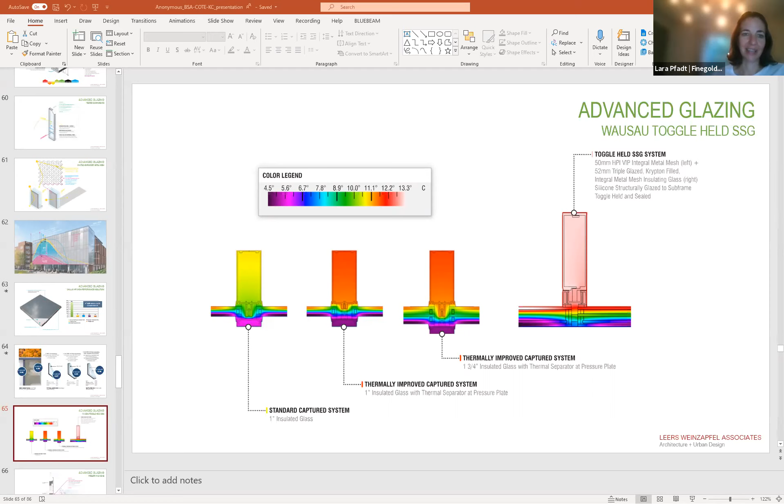I will reiterate that the graphics and the presentation are great, and thank you. We really, from the COTE side, appreciate it. I learned a lot. Anyone else have a burning question?

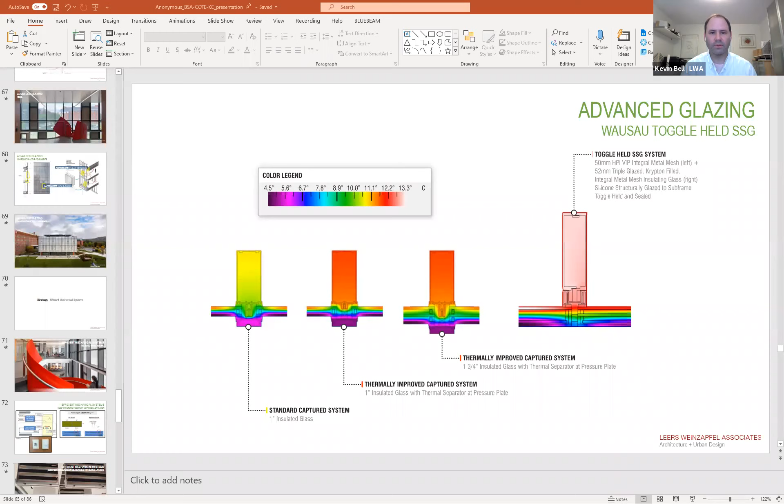Great, yeah Lisa, that means we'll be coming to you and we're going to spec it. I can see why you're asking. Don't see any others in the chat. Anyone else? Please feel free to come off mute and ask away.

I just want to recognize, I see Josiah turned on his camera too, so I want to recognize him as the design partner for the project, setting the design direction. And I think you appeared in one of the photos also, made a cameo, right? Yeah, I was the dean of the Graduate School of Arts and Sciences, and we were in his office during the pandemic — you had to stand in as a building occupant. Right, exactly.

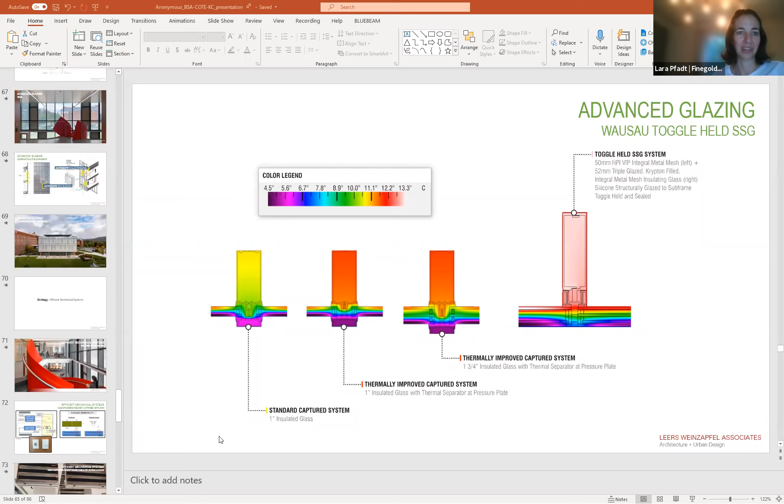Thank you all. And if you think of any other questions, just send them through to Lara and Beth, and we'll be happy to answer them. Absolutely, and thank you again Lara and Beth for the invitation. Thank you, it was fun. Thank you.